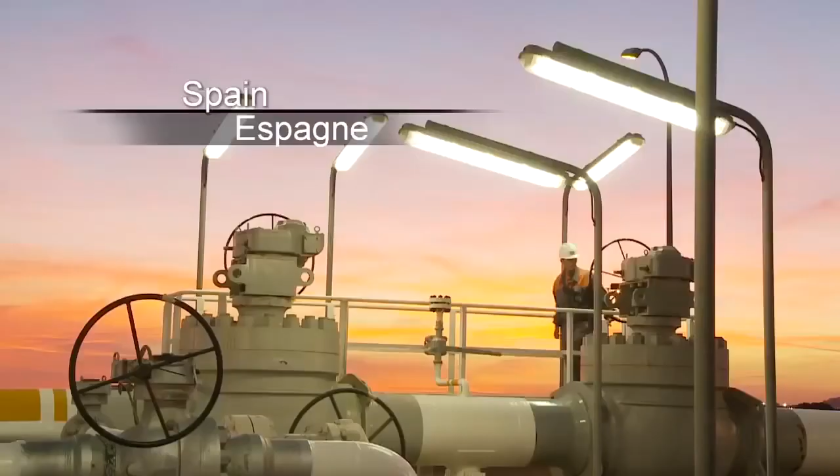The Medgaz project is ambitious. It is a system of transporting natural gas from the producing country, Algeria, to European consumers.

In Algeria, we conceived and constructed a compression station at Beni Saf, situated by the Mediterranean Sea, some 80 kilometers from the city of Oran, 60 from the Moroccan border.

The station is supplied with natural gas from Hassi R'Mel by a 48-inch gas pipeline at a pressure of 40 bars. The gas is compressed to a pressure of 200 bars to allow it to cross the Mediterranean Sea to Spain through a 220-kilometer-long 24-inch pipeline submerged to a maximum depth of 2,200 meters.

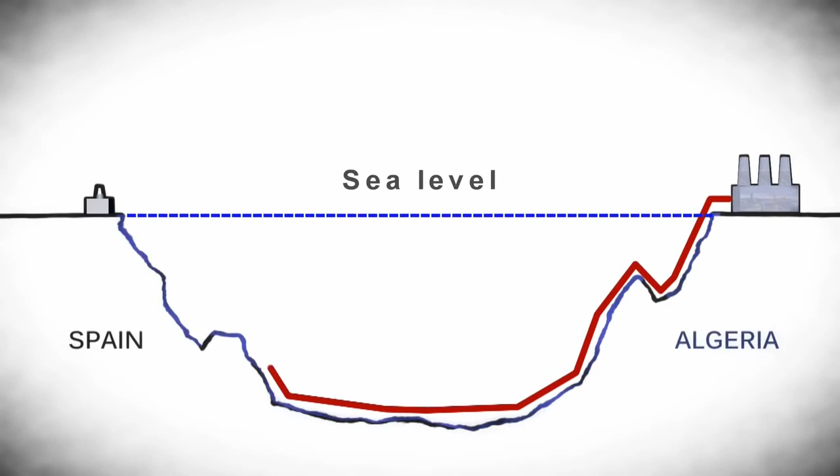A veritable issue, Medgaz will allow a continuous, reliable provision of clean energy to Europe. Declared a priority interest project for the trans-European network in the energy sector by the European Commission, Medgaz answers the growing demand for natural gas throughout Europe.

Made up of Algerian, Spanish and French shareholders, our client Medgaz SA, a company incorporated under Spanish law, has brought together a high level of expertise in technical and human resources through a number of highly reputed international companies.

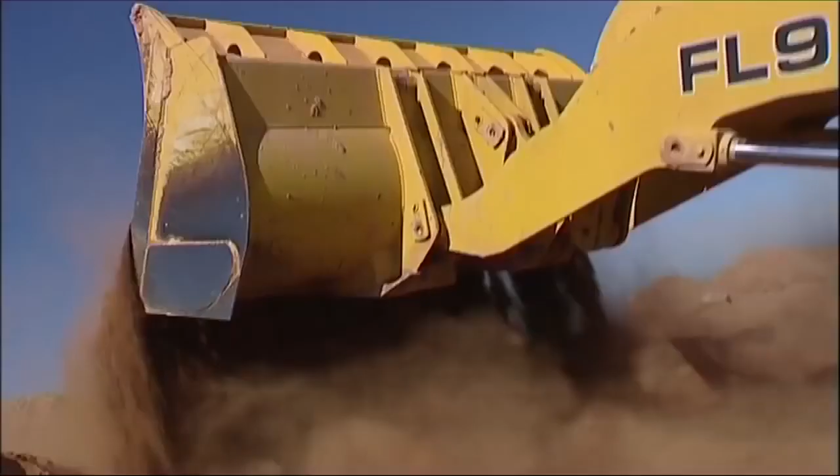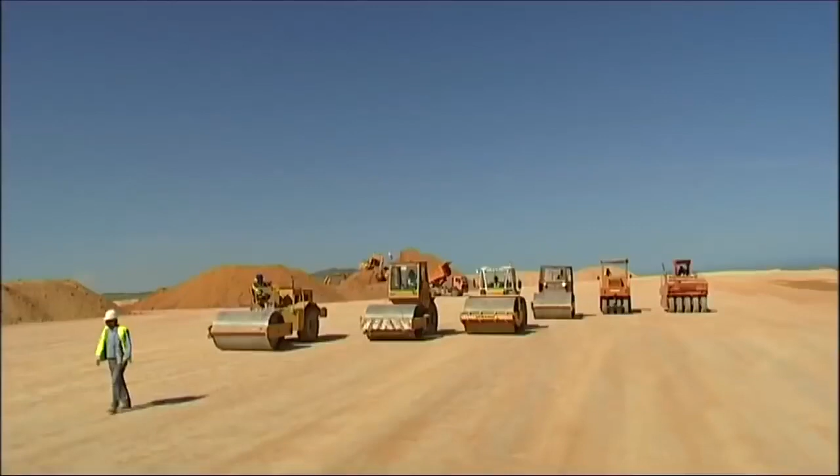Spiecapag, in association with a Spanish partner, participated in the project by constructing the compression station at Beni Saf in Algeria.

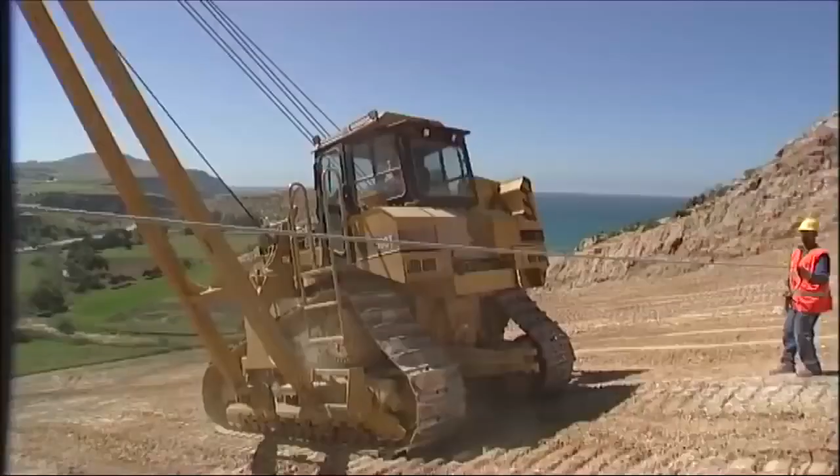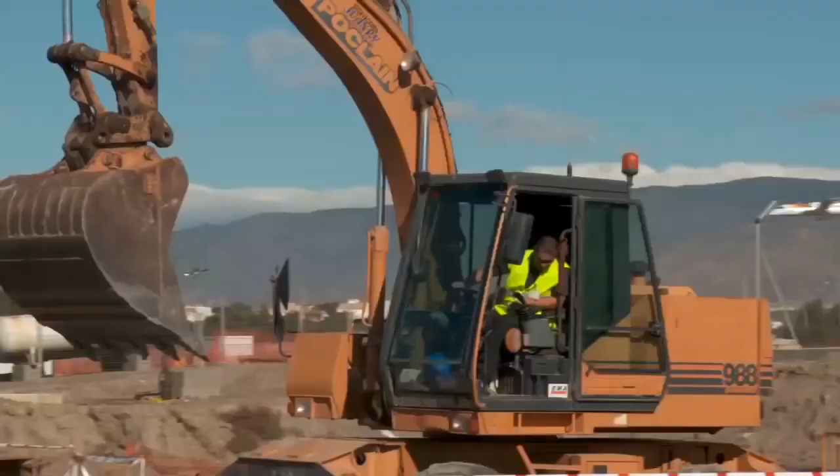This EPC contract, engineering, procurement and construction, was signed in 2006 for a value of 110 million euros, excluding the turbine-driven compressors. A receiving station, OPRT, was also constructed near Almeria in Spain for a value of 40 million euros.

These two stations are connected by an offshore pipeline with a capacity to transport 8 billion cubic meters of gas per year in the first phase. This will increase to 16 billion cubic meters in the second phase.

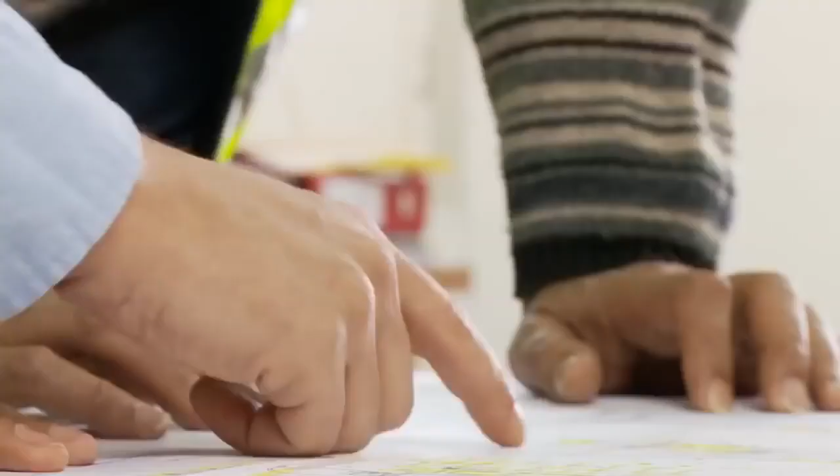Project management was installed in Madrid, close to the client, to supervise the engineering, procurement, as well as the inspection and transportation of the equipment.

160,000 hours of engineering were necessary to design the two sites. No frontiers for procurement. Equipment came from around the world.

England for the turbines, France for the skid gas and compressors, Germany for the drivetrain of the turbines, the US for the turbo generators, Spain for the valves, cables and electric panels, Korea for the tubes and the air coolers, and finally Italy for the bulk materials.

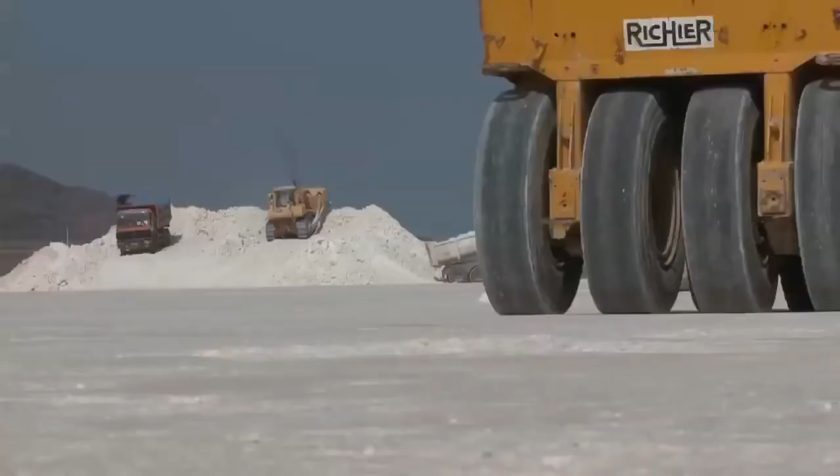The customer and certification organizations participated in each of the factory inspections.

Most of the equipment arrived in Algeria by ship. The port of Arzew, to the west of Oran, was chosen to handle the largest pieces of cargo.

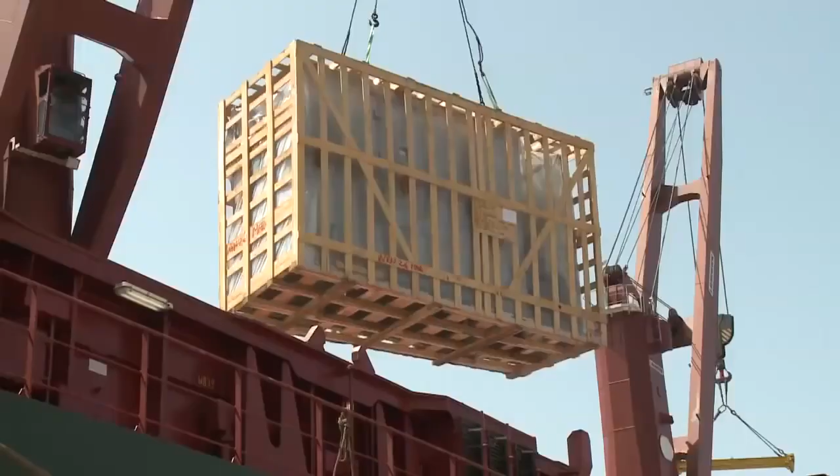A project-dedicated office was an essential tool in clearing materials through customs. Every day during the operation of the worksite, tons of equipment pass through here before being transported by road to the site at Beni Saf.

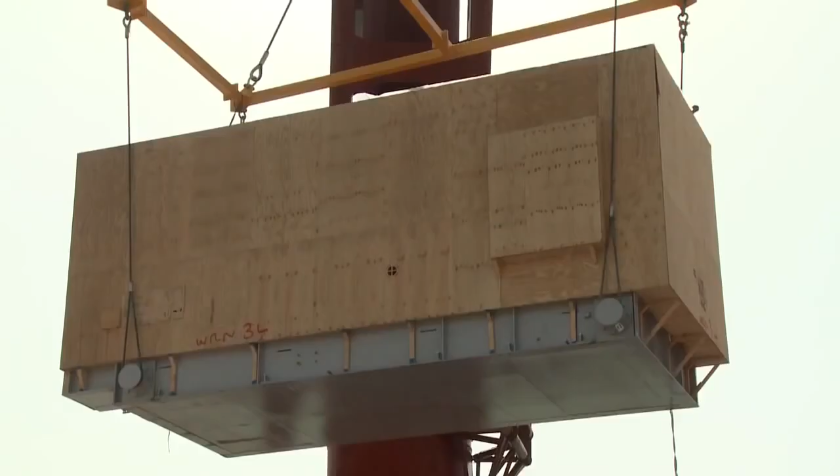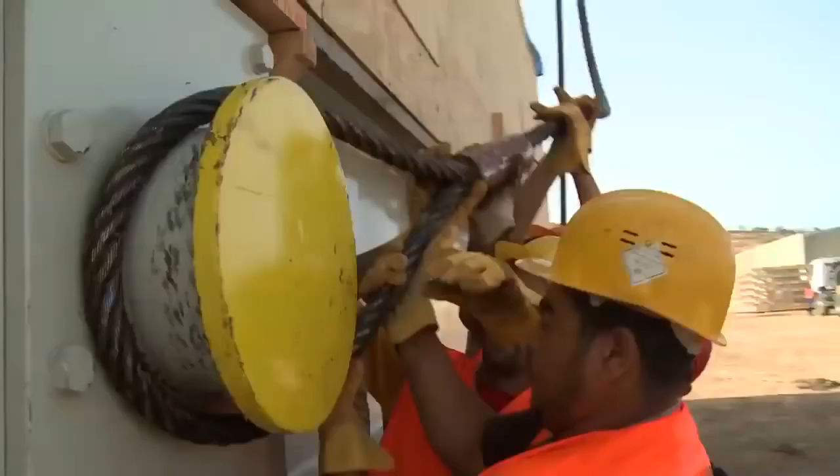August 2008. The 3 turbines and 3 compressors arrived on Algerian territory. Abnormally large crates of about 60 tons each were then transported by exceptional convoy to site, situated about 100 kilometers from the port.

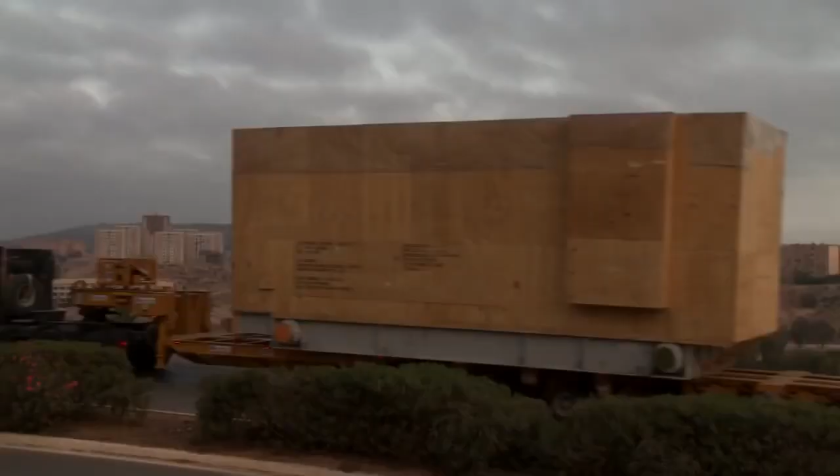Spiecapag set up a number of exceptional organizational solutions to ensure that the equipment was delivered to follow the progress of the works. The turbines and compressors are the key pieces of such a project.

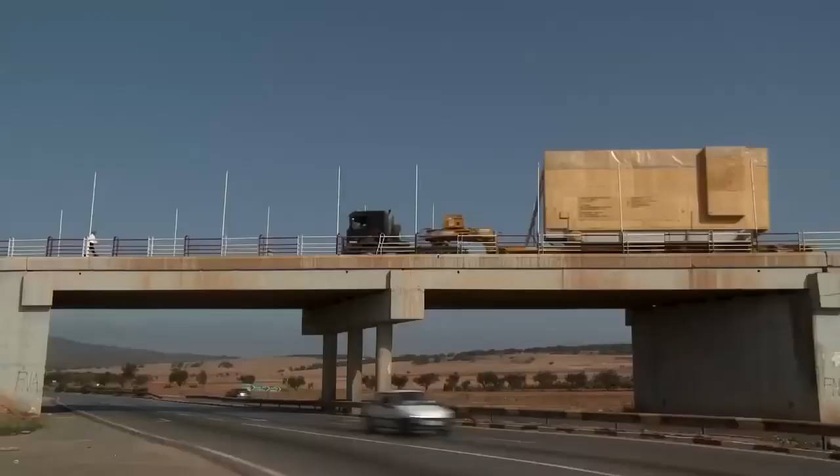Their installation determines the subsequent continuity and progress of the construction works. It's by sharing expertise with its partners that Spiecapag accomplished each of the crucial points in the construction of the project.

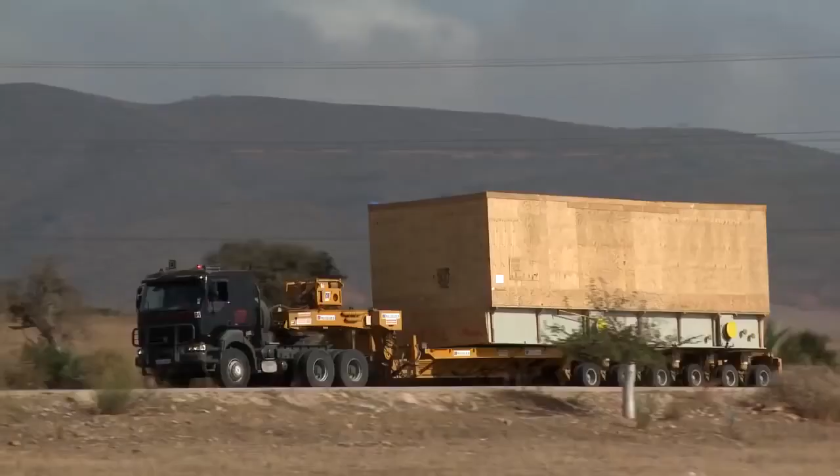At the end of a 2-day trip, the 400 tons of equipment was delivered to the site.

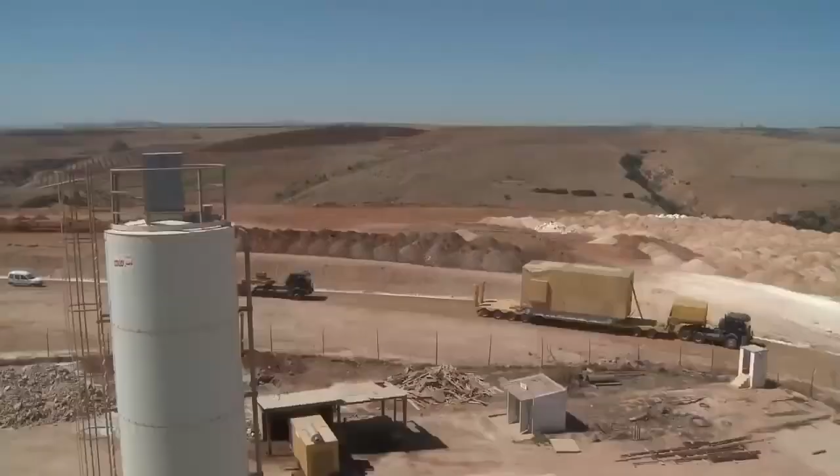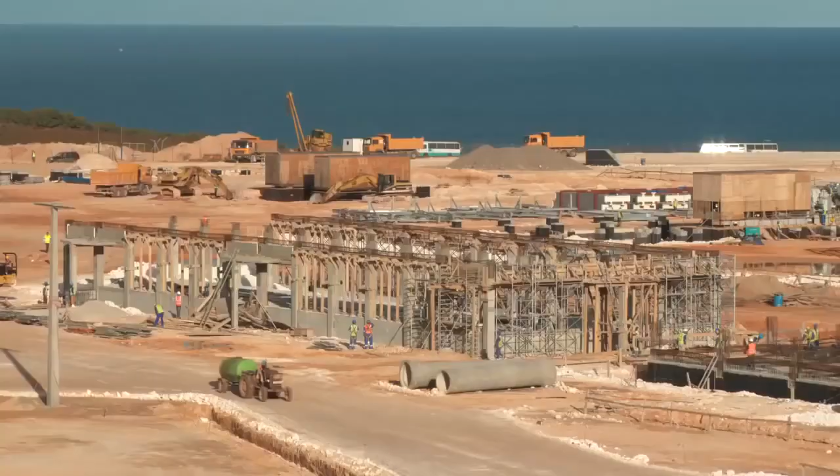The BSCS compression station covers an area of 14 hectares.

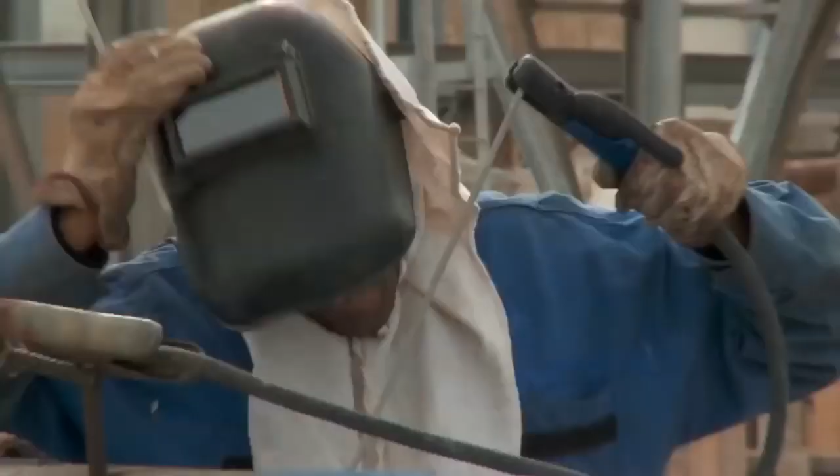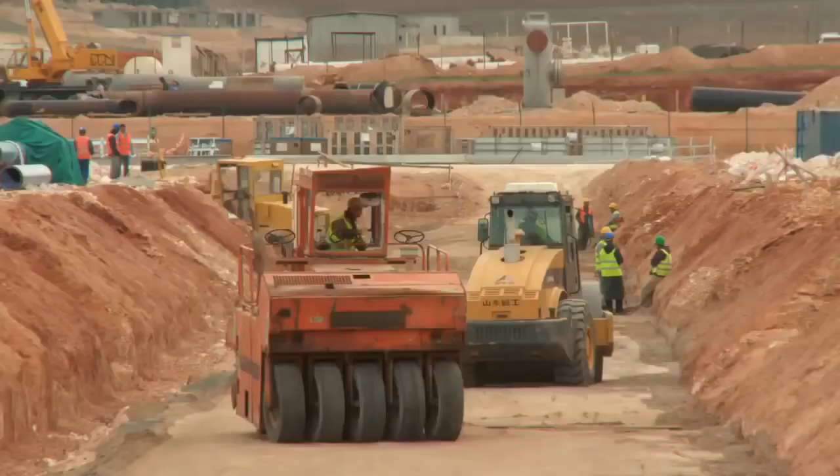All these figures makes Medgaz an exceptional project.

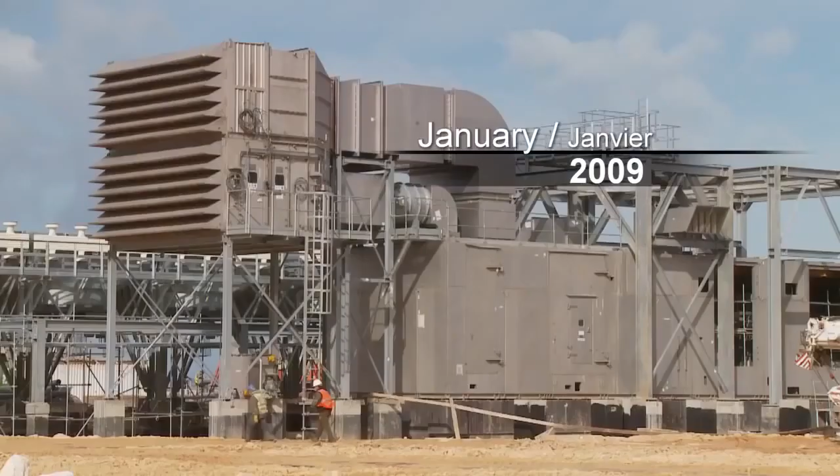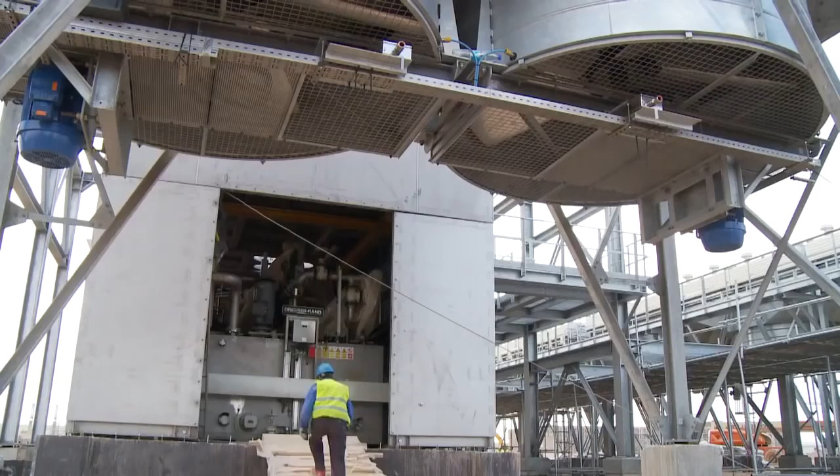Spiecapag, a worldwide leader in pipeline construction and associated infrastructures, has developed a unique expertise in work studies and coordination of subcontracting organizations. An industrial compression station is technically complex work. It represents 120,000 hours of studies.

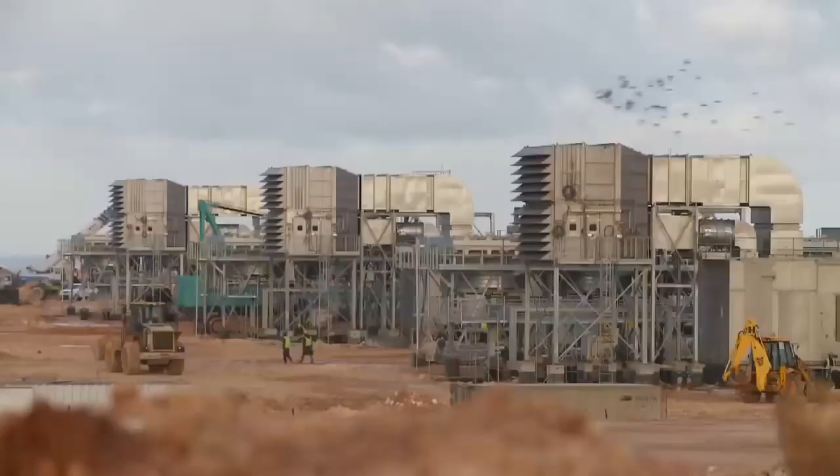In assisting the client, Spiecapag develops a complete mastery of work and responds to the most constraining requirements at the highest level of performance. In the end, the 2 stations of the project represented close to 5 million working hours.

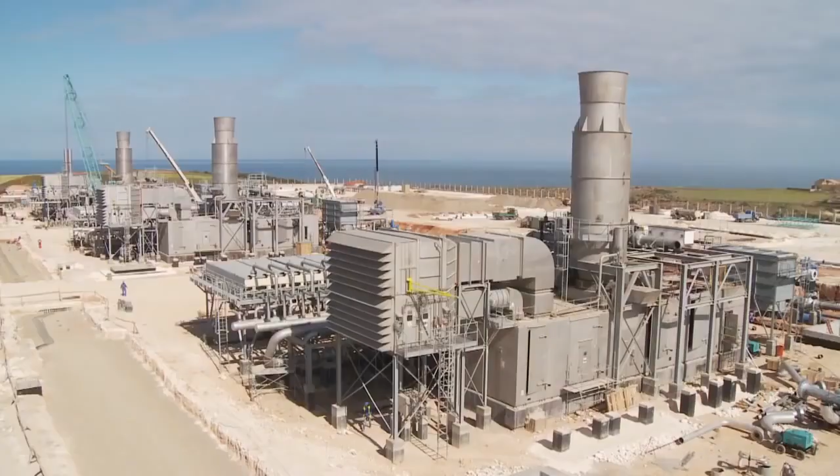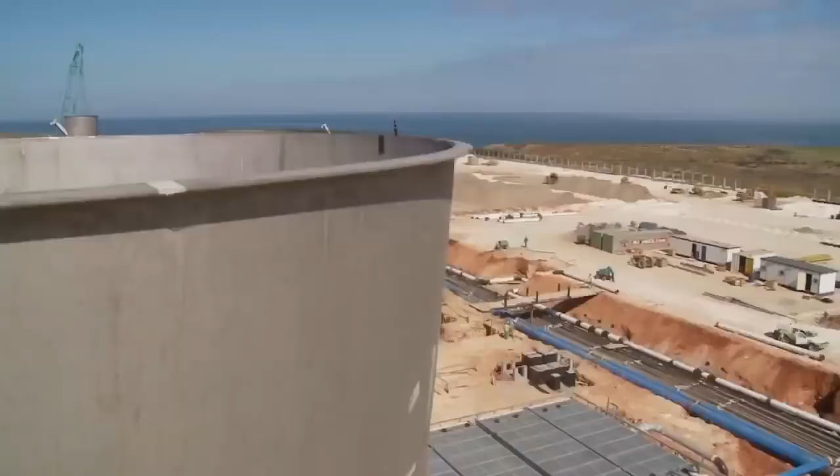The site platform was completed just 1 year ago. It received the 3 units as well as the 3 principal buildings: the control room, electrical building, and the maintenance building.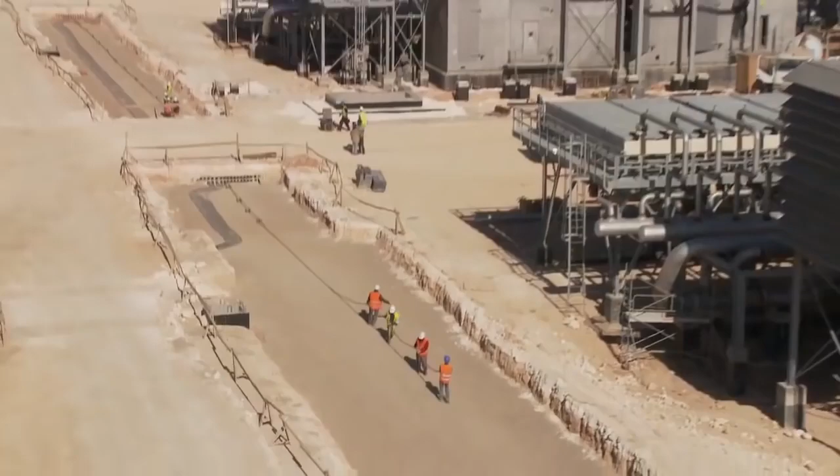The compression station at Beni Saf also has an immense network of cables installed. These are for instrumentation and power supply. They comprise some 350 kilometers.

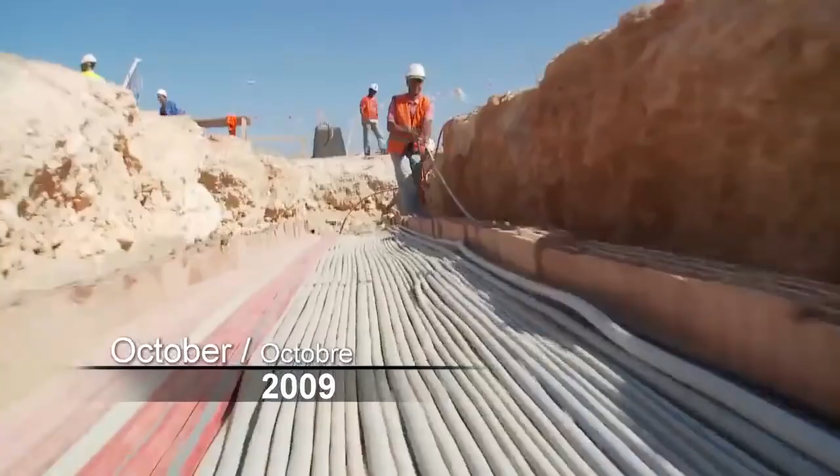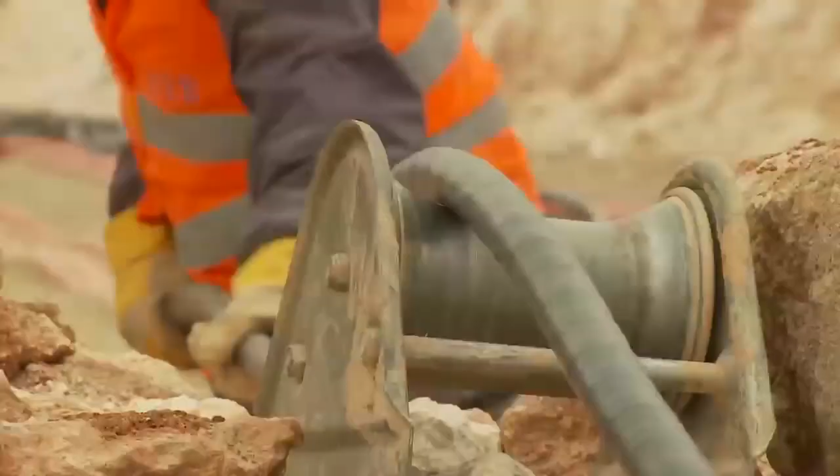A veritable organizational challenge in the opening and closing of numerous trenches is controlled by highly detailed planning in order to minimize the impact to site access.

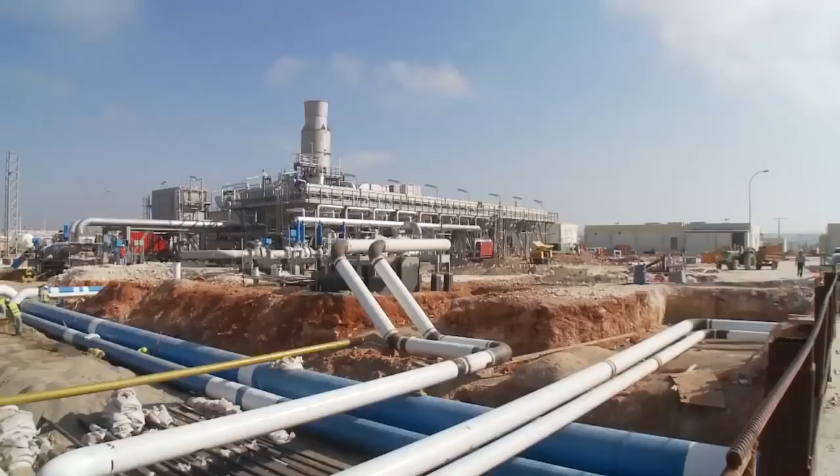Keeping a clear vision of the works allows the SPIECAPAG teams to comply with the high performance required to achieve the quality of the works demanded within the planned duration.

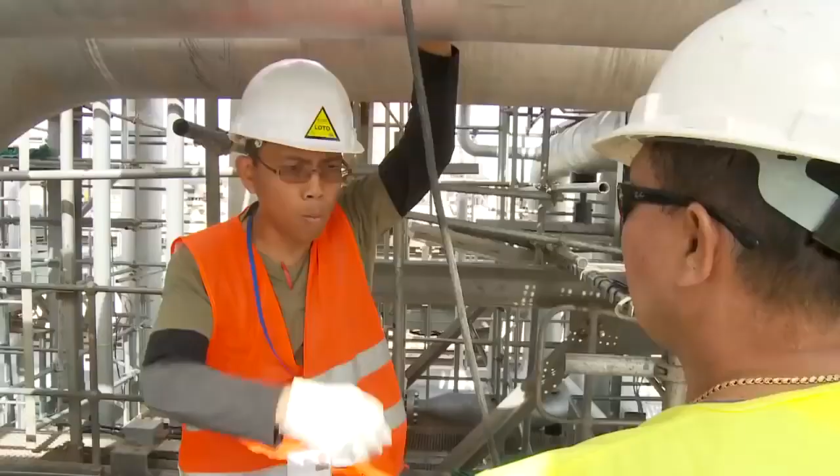Always looking to improve quality, SPIECAPAG continually analyzes processes in order to pass with success the different steps towards renewal of the most recent ISO certifications.

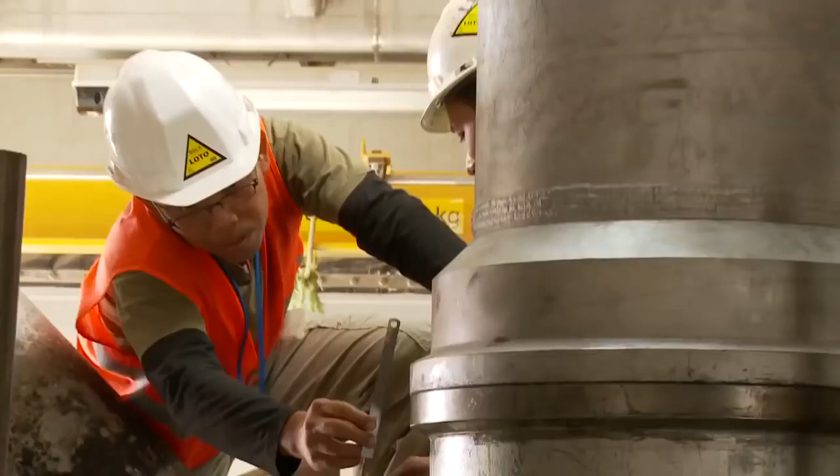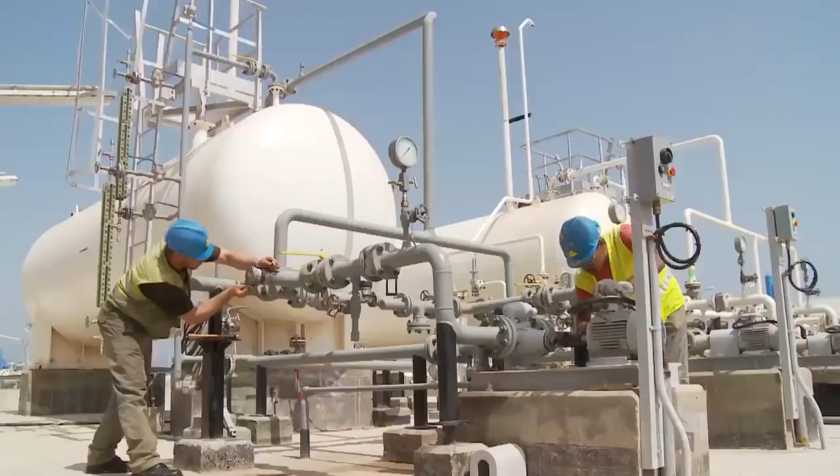In the domain of security, the prevention of risk is an inherent global policy of SPIECAPAG. On all its projects, SPIECAPAG shares their expertise and experience with the numerous subcontractors.

SPIECAPAG participates in social dialogue and imposes a policy. Each participant on site has to be conscious of the importance of safety risks.

Detect situations that are susceptible to be a problem, alert participants and evaluate the risk levels, always improve actions, make people aware, educate, train. Such are the strong points of SPIECAPAG regarding risk prevention.

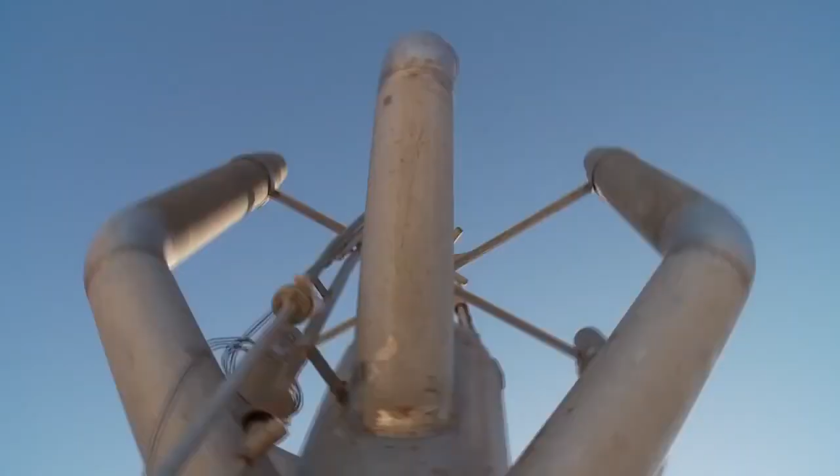SPIECAPAG's plans and training are the tools for prevention. There were no serious accidents on the project Medgaz. Implication by all the personnel is the basis of these good results.

SPIECAPAG practices the sustainable development policy of the group Vinci. It undertakes to reduce the impact due to activity during the work sites. A program of training and implication of the personnel is set up.

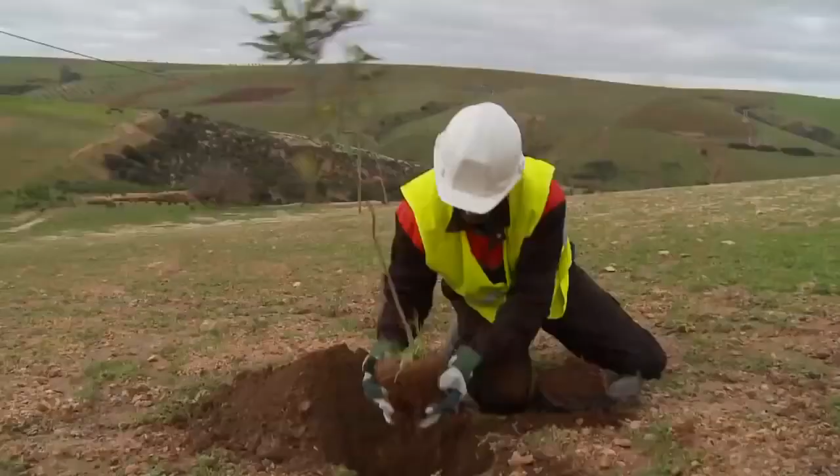In the proximity of the station, the planting of trees and shrubs will in time form a true screen of greenery opposite the Mediterranean coast.

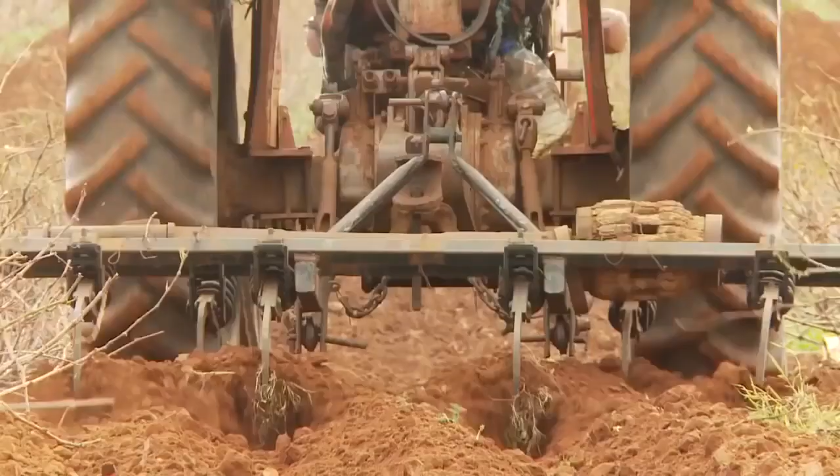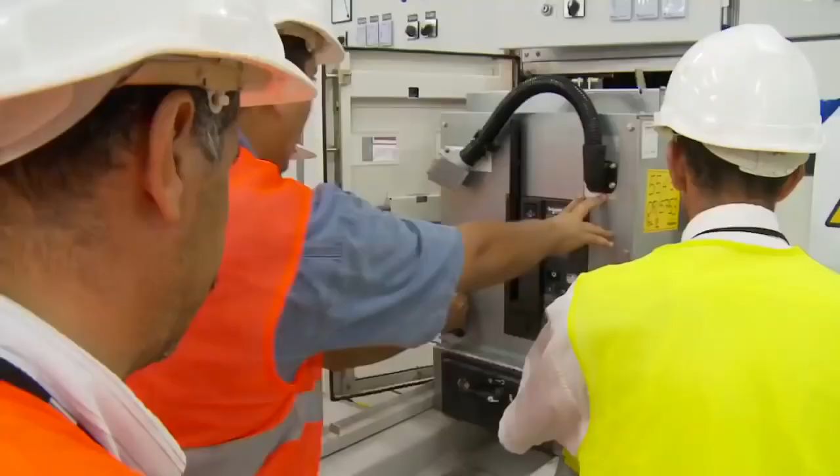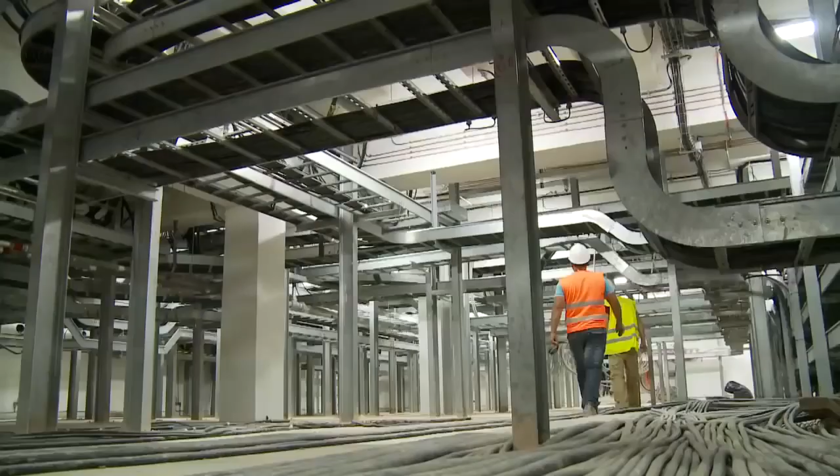SPIECAPAG promotes the transfer of expertise always as a matter of priority. On the project Medgaz, SPIECAPAG elaborated specific contents of training program on the basis of the client's technical documents.

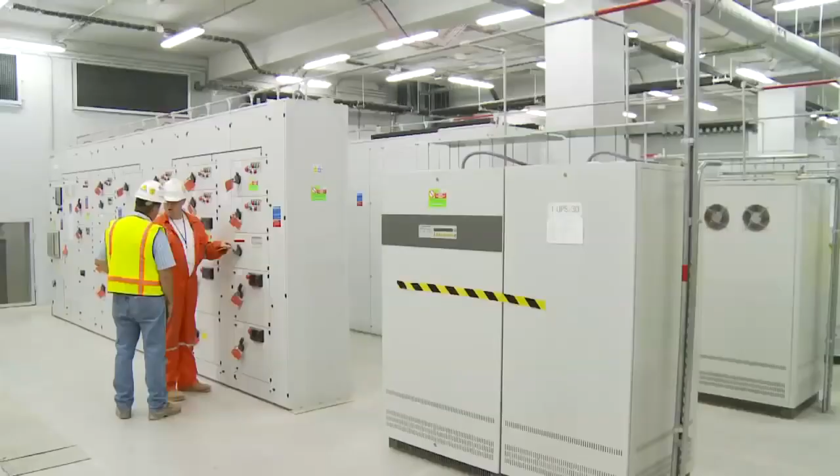Theoretical and practical training is supported by experimentation regarding the evaluation of knowledge. Altogether, more than 20,000 hours of training were expended on this project.

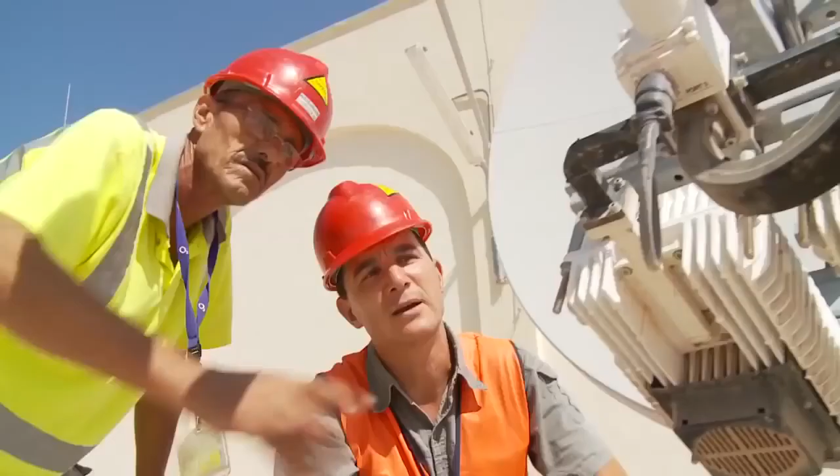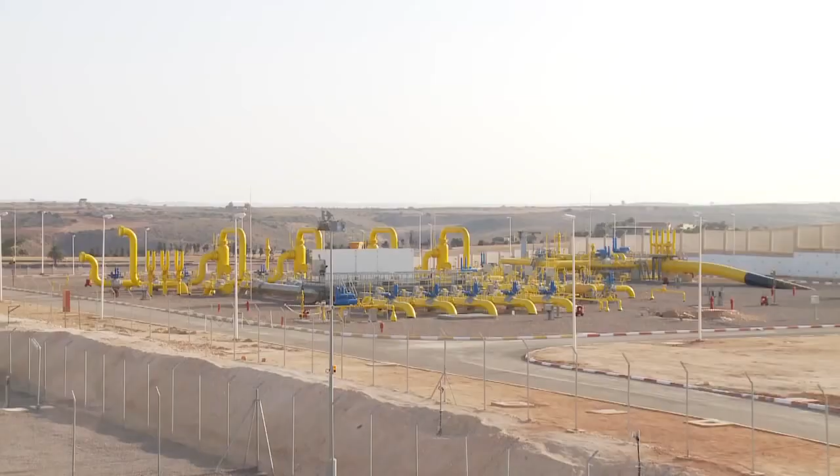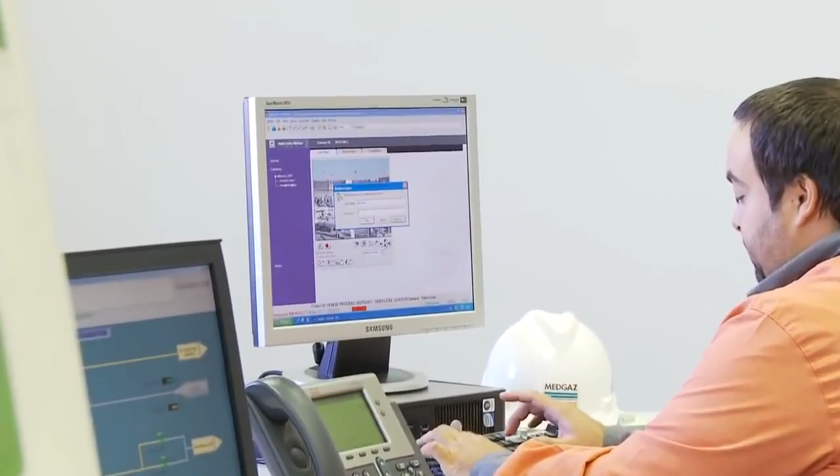October 2010, the gas arrives at the Beni Saf station from the gas fields of Hassi R'Mel. March 1st, 2011, the gas arrives in Spain after crossing the Mediterranean in a few minutes.

A new network of energy towards Europe is opened. The Medgaz project has turned a dream into a reality.